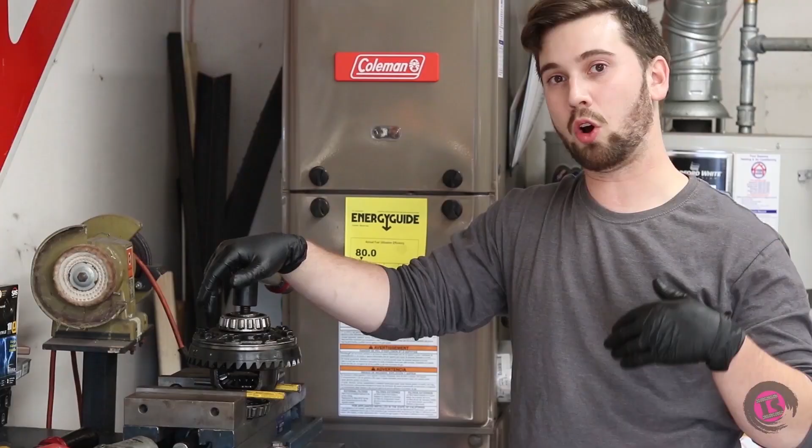Today we're talking about drive shafts, and you better watch out because it's gonna get nerdy. In this series, we nerd out on the science and physics that play a role in just about everything. We dive into the way things work and examine the incredible engineering that goes into going fast.

So today I wanted to bring up a topic that I have been struggling with on the Legacy. If you guys haven't seen the build video of the Legacy, go check it out. This is our H6 swap 2nd gen Legacy with a rear wheel drive conversion with a BRZ 6-speed transmission. One of the critical things on this project was the drive shaft, because there's no configuration where an R160 rear diff in a Subaru was paired with the 6-speed transmission.

And the length of the transmission is different than the standard 5 speeds and 6 speeds for Subarus because its chassis is different than a BRZ and an FRS. Obviously we have some issues, so we had to build a custom drive shaft. This was probably the most frustrating part of the project and the most expensive because I had to learn my lesson the hard way. I'm teaching you guys in hopes that you don't waste your money having to build and rebuild a drive shaft because it wasn't built properly.

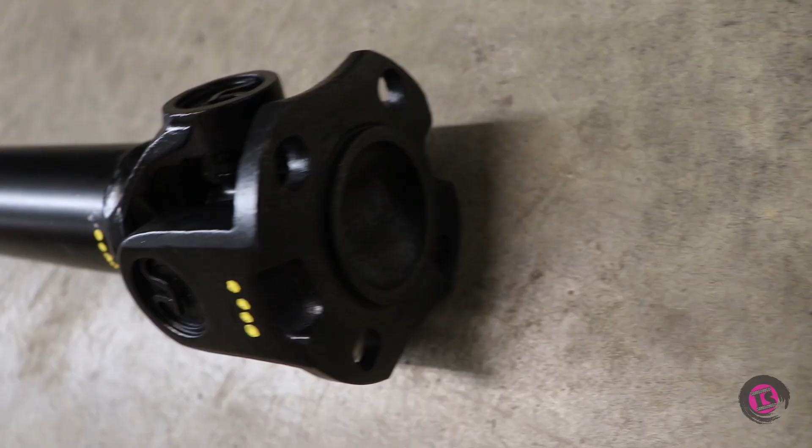You have the U-joint, which is the joint that actually articulates to transfer your movement into an angle. And you have the flange yoke, that is the part that attaches to the differential flange. And then you have the drive shaft tube, of course, which is just a piece of steel or aluminum tubing that's attached to the yoke ends to essentially connect the whole drive shaft together.

A lot of controversy. Why 1-piece versus a 2-piece? There's a couple different reasons, one of which being size constraints. The overall diameter of the drive shaft tubing is essentially what limits you from being able to span a certain distance safely. That's the problem with the Subaru, is that we have such limited size in there because it was meant to be an all-wheel drive car.

Not a rear-wheel drive car, to basically get our torque transferred all the way to the back. If we go to a 1-piece drive shaft, we would have to up the diameter a lot, which actually requires quite a bit of modification to the tunnel to make it fit, which was what I had to do to the Impreza because it does have a 1-piece aluminum drive shaft.

The other thing is cost. When you go to a 1-piece drive shaft, you have to use lightweight material in order to reach your safe operating RPMs for that drive shaft. So a lot of people turn to aluminum and carbon fiber as materials for the drive shaft, because if you can reduce your rotating mass, you can increase the safe operating RPM that the drive shaft is able to obtain.

But that's expensive, and we weren't trying to go expensive with this because I don't need the car to go 200 miles an hour, and I'm only transferring about 200 foot-pounds of torque to the rear diff. Really not that much. The other reason why you would choose 1-piece over 2-piece is just smoothness.

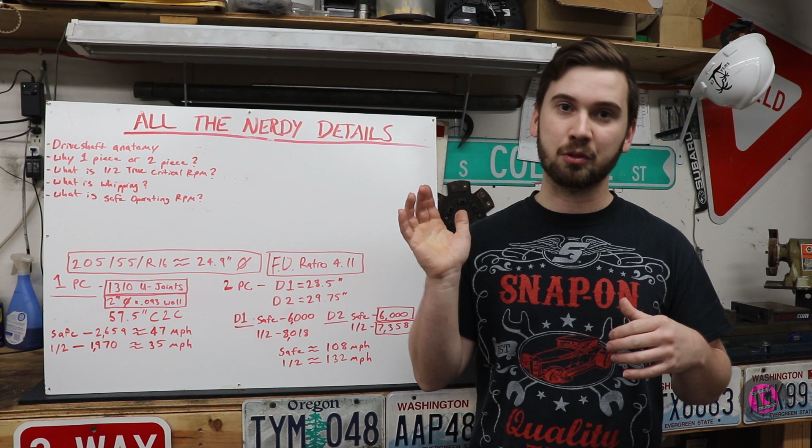All these calculators can be found on Spicer's website. Spicer's a U-joint, driveshaft, and drivetrain manufacturer, and they offer all these awesome tools on their website to use. So if you ever want to design a drive shaft for a custom application, you can go on there and figure out what you need tubing wise to make it work.

All these numbers are derived from a couple different constants, one of which being the type of U-joint, the series of U-joint that you're using. In our specific application, we're using a 1310 series U-joint from Spicer. The length of the drive shaft center to center on that U-joint, and the tubing diameter and wall thickness. Wall thickness matters because it attributes to the mass of the drive shaft.

I don't know what the formulas are. I just use the calculators because it was a lot easier that way than to try and figure it out.

The half-true critical RPM of a drive shaft is essentially the halfway point in the maximum amount of rotation that you can get out of a drive shaft. Now obviously you'd never want to run a drive shaft at the full rotation capacity of it because you're right around the danger zone where a drive shaft can explode.

And it happens too. Why is that important? Well, because at half the value, the drive shaft reaches a harmonic resonance. So you want to adjust the length, diameter, and wall thickness of your tubing to make sure that that half critical RPM number is way outside the cruising range of the car.

So say the half-true critical range is right at 55 miles an hour. Now a lot of highway cruising speeds are at 55 miles an hour, so I'd actually want to adjust something in my drive shaft—whether it be the length, the tubing diameter, or the wall thickness or material—to get that outside of that range.

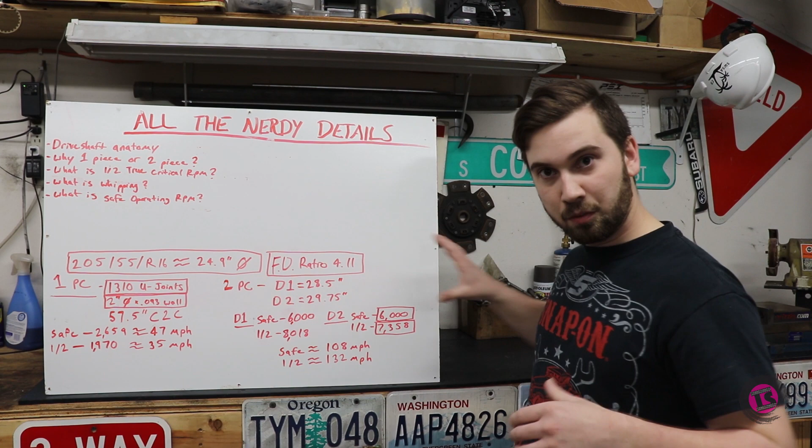I've done a little bit of calculations here to show you guys the issues that I had when I first designed this drive shaft. A little bit of backstory—I took my ends to a drive shaft shop.

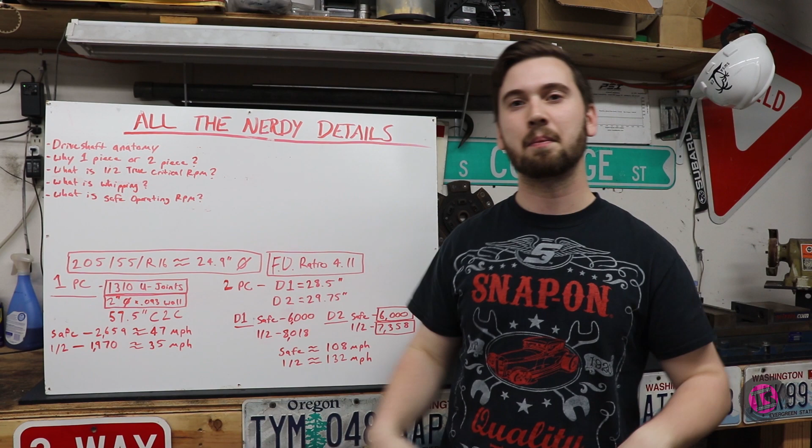I told them how long I needed it to be, and they produced a one-piece drive shaft. I put it in, and it vibrated horribly at 35 miles an hour, so bad that I couldn't even drive the car. If I even tried to go highway speeds, it was just awful.

Long story short, I ended up taking the drive shaft back to the same people. They turned it into a two-piece drive shaft, but it wasn't balanced properly after that, so I had to take it to another shop. It was just a big mess. Our constants here: tire size.

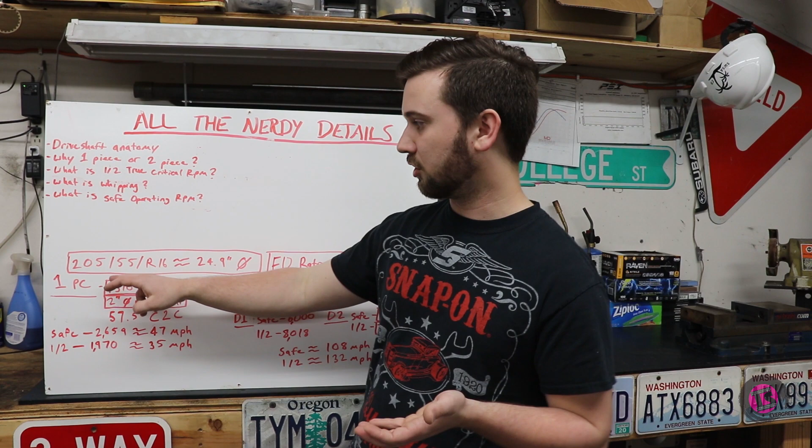I'm running a 205 55/16, that's roughly 24.9 inches diameter for the tire. My final drive ratio, which is in the differential, we take roughly 4 times that, and that's what the drive shaft RPM is. So that's going to be 4.11, so it's a 411.

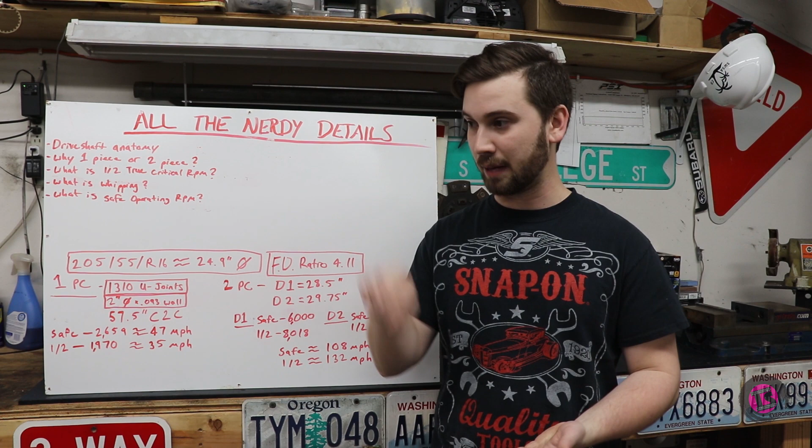On our drive shaft, the constants here are 1310 series U-joints, 2-inch diameter tubing, 0.093 wall thickness. Originally, when it was a one-piece drive shaft, it was 57.5 inches center to center on the U-joint. That's the center of the U-joint cap to the center of the U-joint cap for the length of the drive shaft.

If I put those numbers into the calculator, it gets me a safe operating RPM of 2659 RPM, and a half critical of 1970.

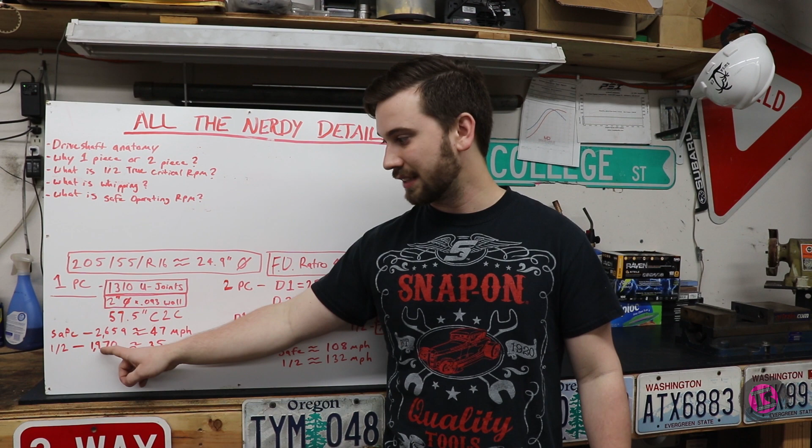Now if I convert that using our final drive ratio to actual miles per hour, I'm hitting the half critical RPM at 35 miles an hour, which means if I sat at 35 miles an hour for too long, I would get an awful vibration, which I was. The safe operating RPM is 47 miles an hour, which means I'm exceeding the safe operating RPM of the drive shaft just pulling onto the highway.

That's bad. If you apply those types of vibrations for too long, not only can you risk damaging the drive shaft, but you can also damage the bushing that guides the slip yoke in the transmission, or you can destroy the roller bearings that support the pinion in the rear differential. All not very good things.

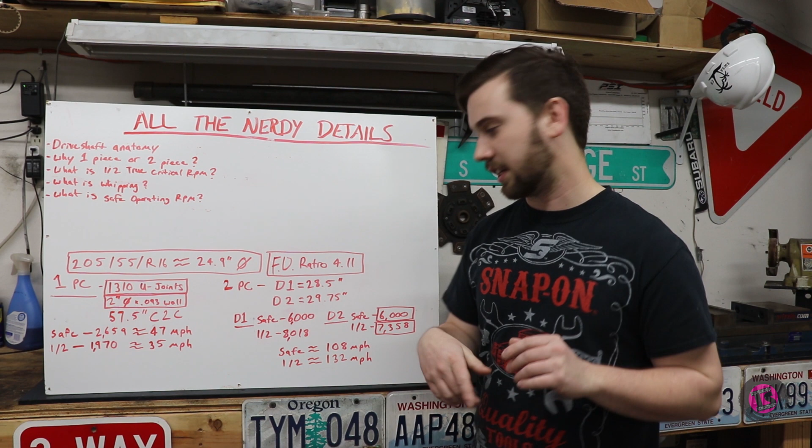Now watch this. Just taking it and converting it to a two-piece drive shaft, D1 and D2. D1 is the drive shaft length on the first section, and D2 is the drive shaft length on the second section. So D1 is 28.5 inches and D2 is 29.75 inches. Getting the half critical and operating RPM out of that, D1 gives us 6,000 RPM as our safe range.

And now look at this. Because of the way the drive shaft is designed, it actually takes our half critical RPM and shifts it above the safe operating RPM range. So there's actually no scenario, if we stay within that safe operating RPM range for this drive shaft, that we can even get a vibration from reaching the half critical.

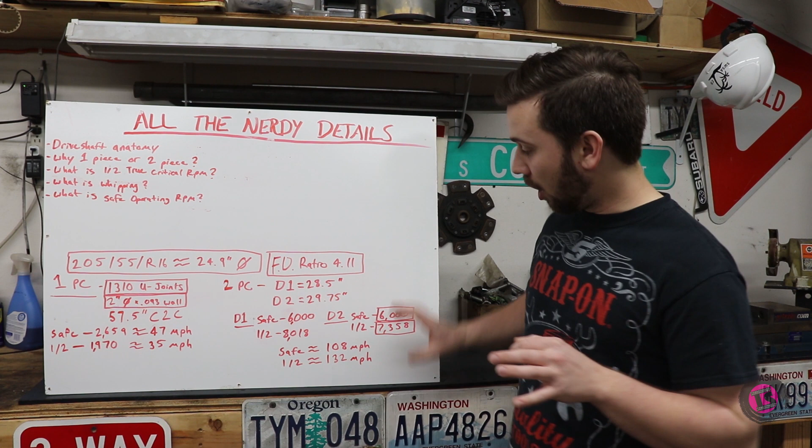D2 gets us 6,000 RPM and 7,358. So obviously you want to take the worst of the two numbers, and our safe operating RPM gets us 108 miles an hour, which is well above any speed I would need to go if I'm driving it on the road regularly.

The other thing too is we won't actually hit the half critical RPM even at the worst section of the drive shaft until 132 miles an hour. I don't think I ever want to go that fast in the Legacy. I think we're gonna be okay.

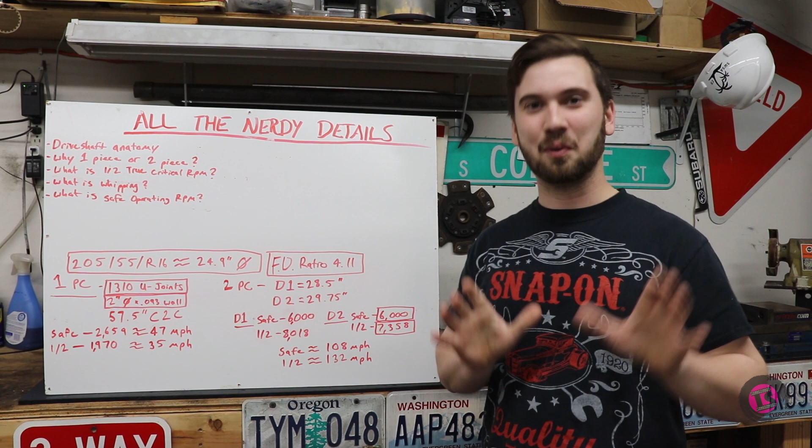Now that we got our drive shaft back and it's balanced properly, we're gonna put it in the car and go test drive it, see how it feels, and see if all the vibrations have gone away.

So I got her out on our test road, cruising around 60 miles an hour, buttery smooth. I think all of our vibration issues have been fixed, and it's a much nicer car to drive. It's amazing how much of a difference it makes. That's physics in motion, my friends.